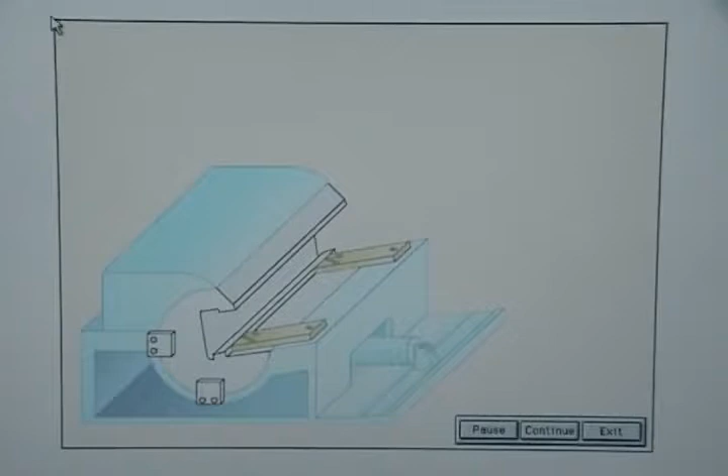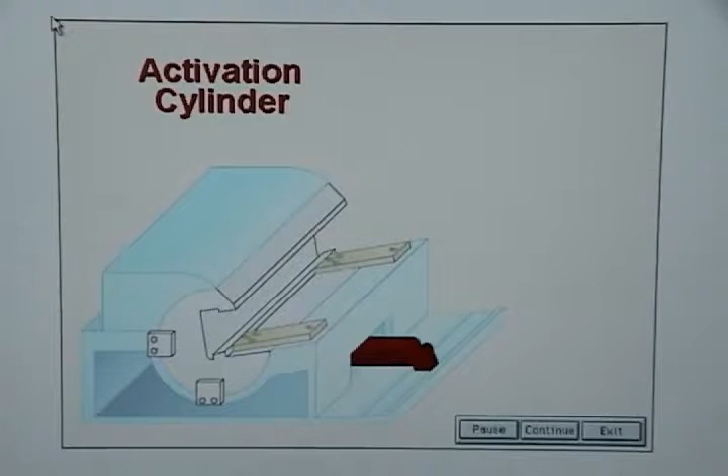Rotary cams were developed to improve the process for forming flanges. They eliminate die flex and improve part consistency. A rotary cam is made up of a rotor, drive plates, a rotor cap, end stops, a rotor holder, and an activation cylinder. The rotor is a cylindrical detail that rotates into position to complete the part geometry.

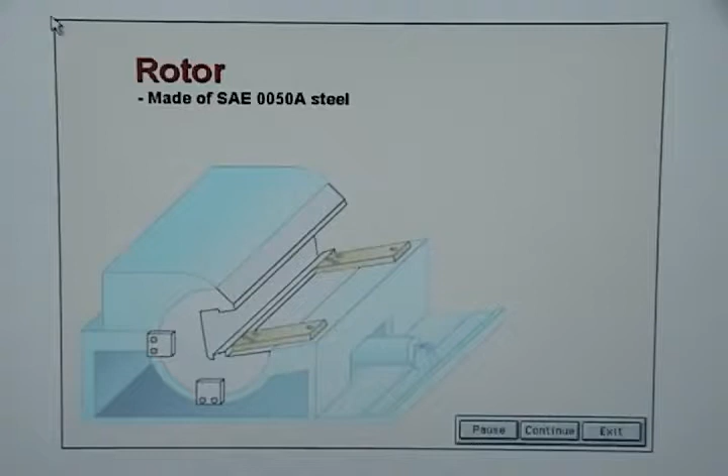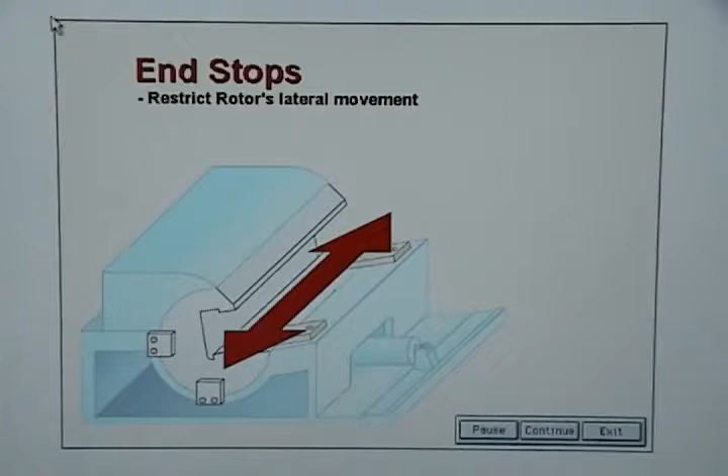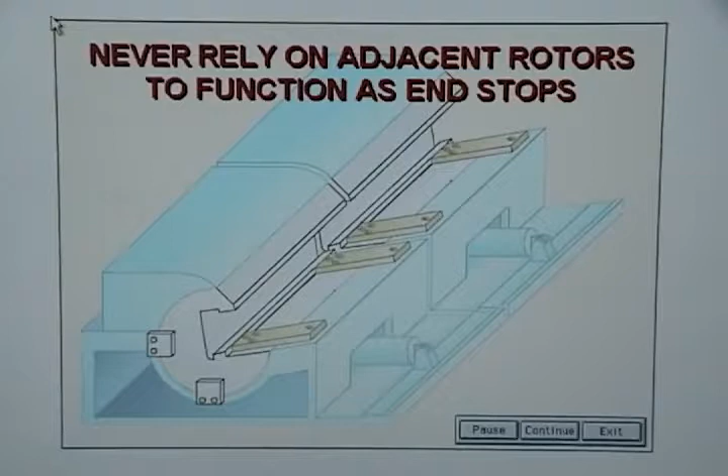Rotors are typically made of SAE 0050A steel and are not usually heat treated. End stops restrict the rotor's lateral movement. They can be located at the end of rotors or along the rotor. Die makers should never rely on adjacent rotors to function as end stops, because doing so could cause the rotors to rub against each other and bind.

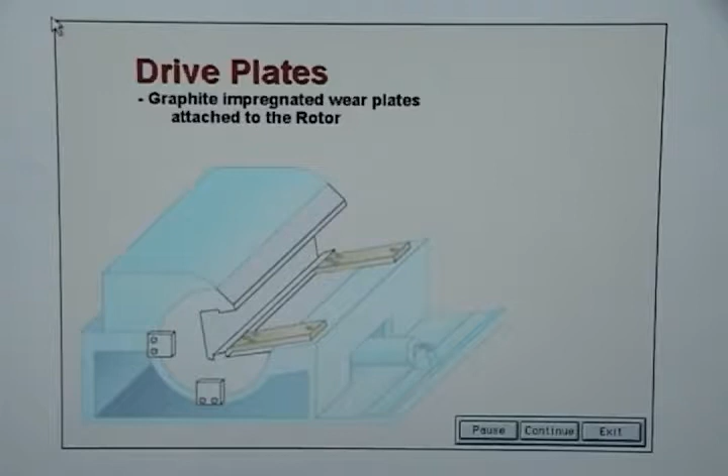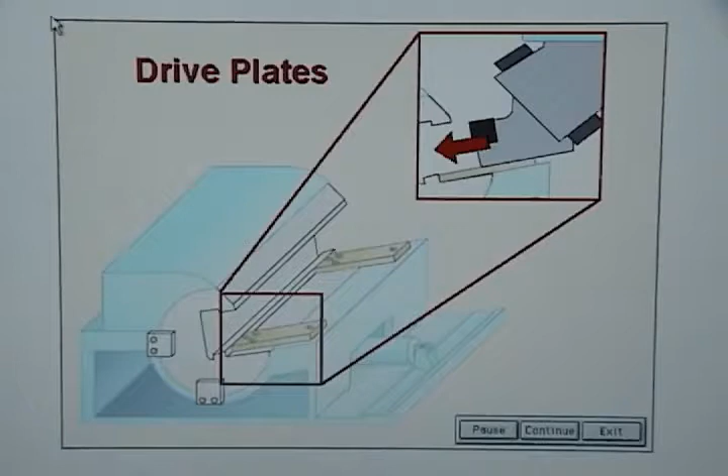Drive plates are graphite-impregnated wear plates that are attached to the rotor. When the rotor turns from its home position to its work position, the drive plates provide the surface for the cam slide to move on during the flanging operation. The rotor cap is mounted to the rotor holder and covers the full length of the rotor. It gives support to the rotor and provides part geometry.

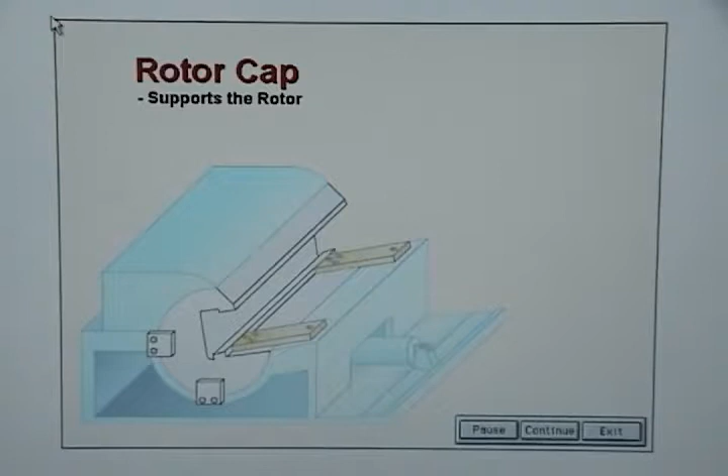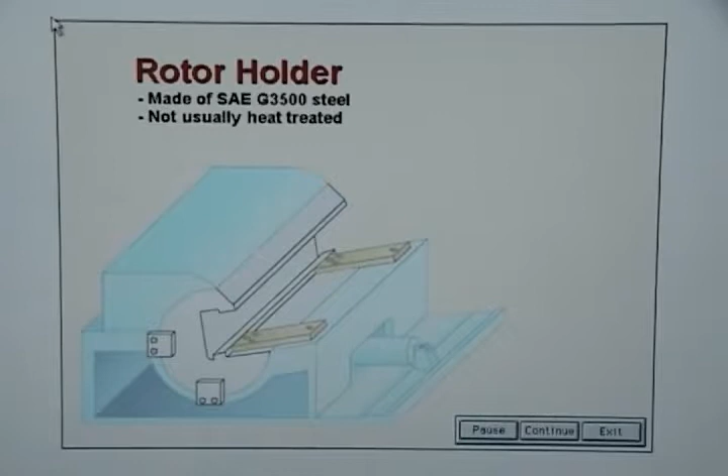The rotor holder holds the rotor. It is made of SAE G3500 steel and is usually not heat treated. The rotor holder and rotor cap are keyed and bolted together to form an assembly. The assembly is bored as a unit, and then the rotor is ground to fit the bored assembly.

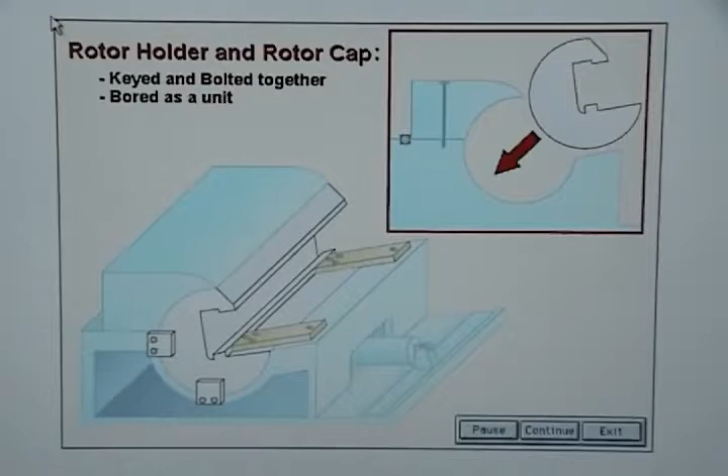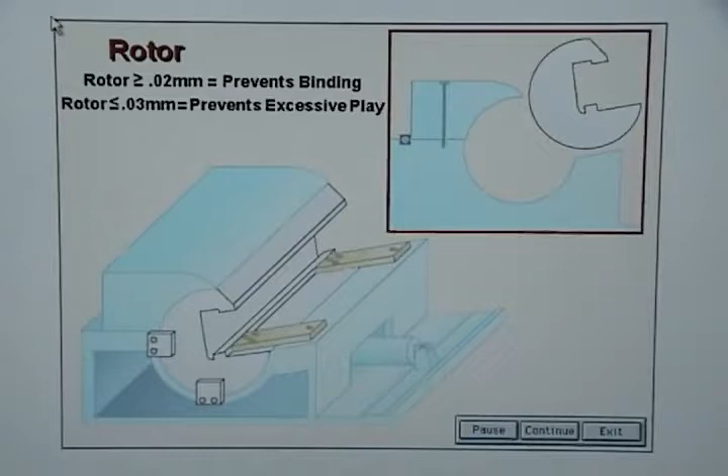The rotor must be at least 0.02 of a millimeter smaller than the bored assembly to prevent binding, but not greater than 0.03 of a millimeter, or else there will be excessive play. After the rotor is ground, it is referred to as the master, which means that the rotor holder and rotor cap must always be spotted to the rotor.

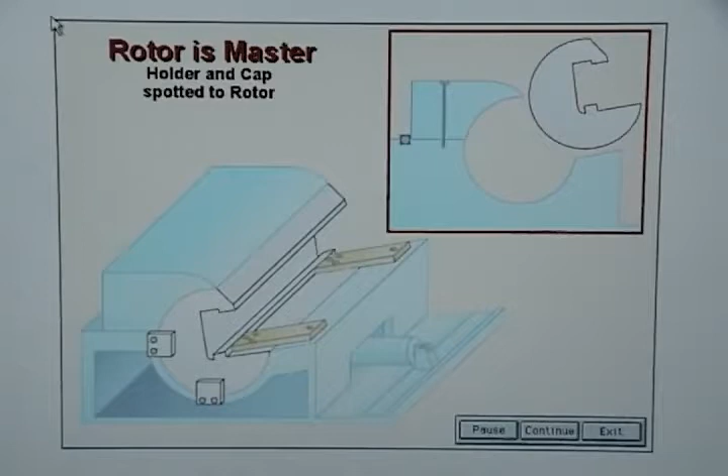The activation cylinder is used to move the rotor to its work position and back to its home position. The activation cylinder operates when the press reaches 2 program positions. When the press reaches the first program position, the activation cylinder moves the rotor to the work position. When the press reaches the second program position, the activation cylinder moves the rotor to the home position. The activation cylinder must be pressurized with between 20 and 25 pounds of air to operate properly.

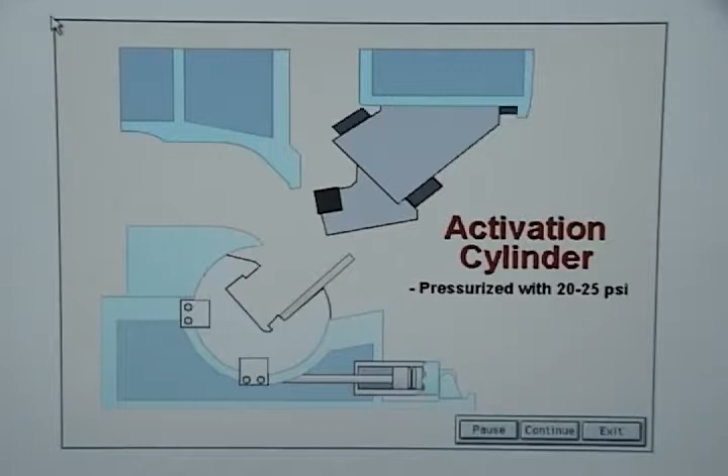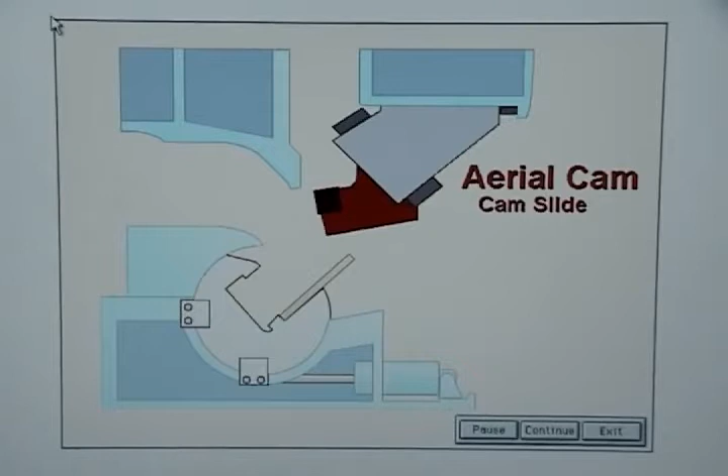An aerial cam is made up of a cam adapter and a cam slide. The cam adapter attaches to the die and has a spacer behind it for making position adjustments. The cam slide is usually the component that holds the flange steels. As the press moves downwards, it reaches the first program position, and the activation cylinder moves the rotor to its work position. When in the work position, the rotor supports the part and provides the holding surface for the press pad.

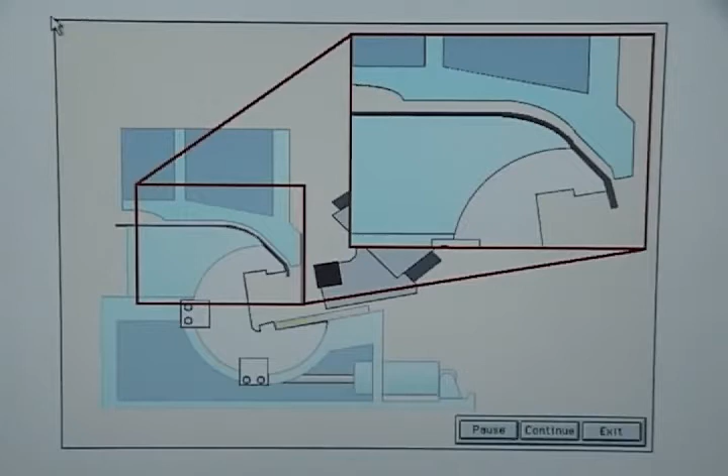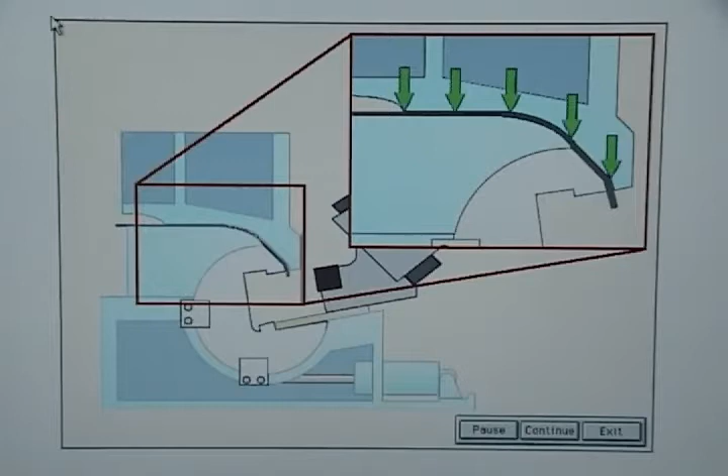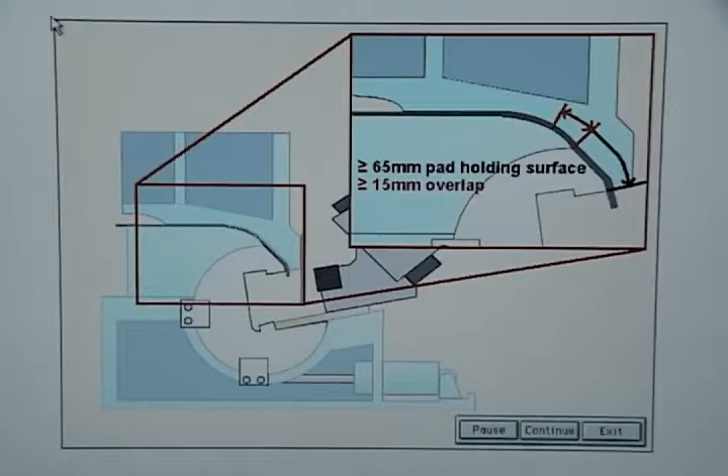The drive plate should bottom out 5 to 10 millimeters before the press pad contacts the part. The press pad provides pressure to hold the part while the flange is being made. There must be at least 65 millimeters of pad holding surface along the flange line, and at least 15 millimeters of it must overlap onto the rotor cap. After the press pad contacts the part, the horizontal motion of the cam slide forces the flanging steels into the part and forms the flange.

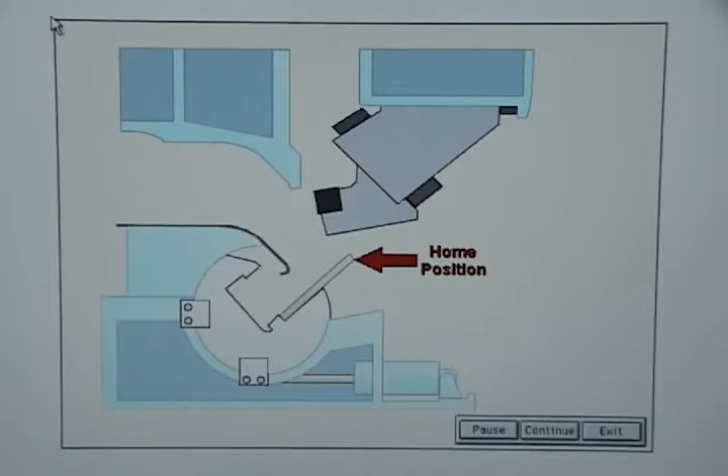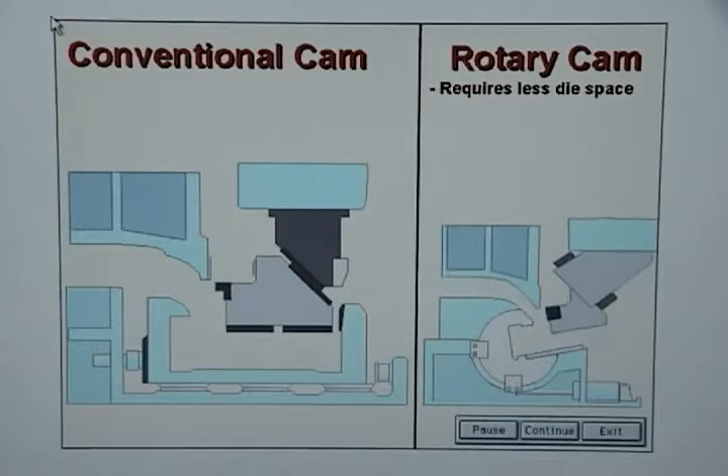As the press begins its upward cycle, it reaches the second program position, and the activation cylinder pulls the rotor back to its home position. This provides enough clearance for the flanged panel to be removed from the press. Rotary cams have several advantages over conventional cams. Rotary cams are compact and take up less die space than conventional cams. Their rotary motion allows flanging operations to be performed using a small amount of die space, whereas the horizontal motion of conventional cams takes up a lot of die space.

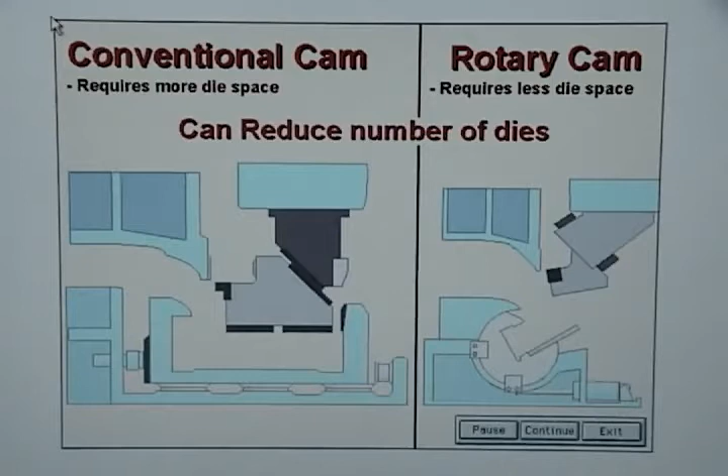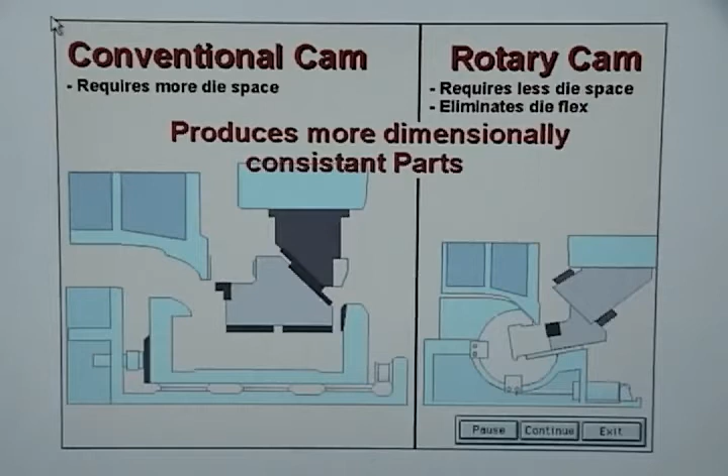Saving die space is important because it creates room for adding other operations to the die, which can reduce the total number of dies required to make a part. Rotary cams also provide an extremely solid base for the die that prevents the die from flexing when under pressure from the press. This is important because eliminating die flex results in parts that are dimensionally consistent. Conventional cams require more hollowed-out space in the die. This reduces support and causes dies with conventional cams to flex when under pressure from the press.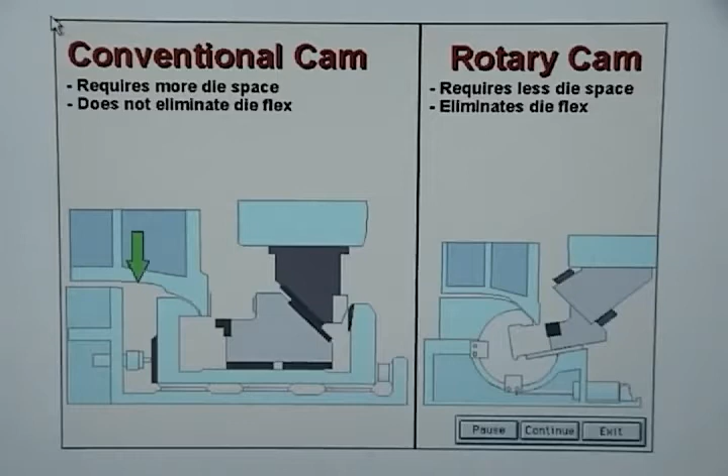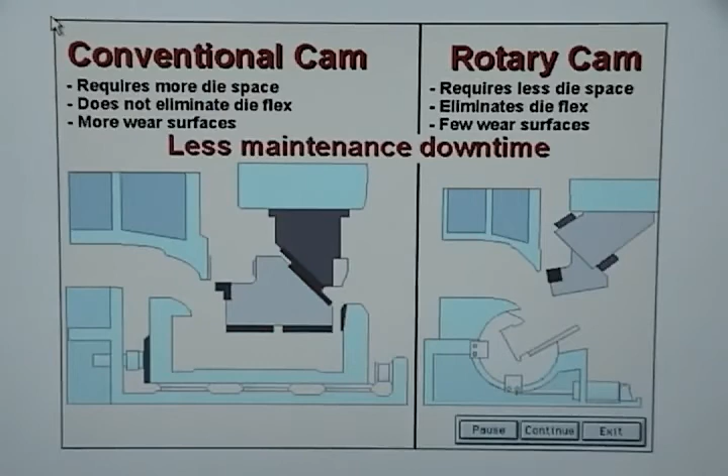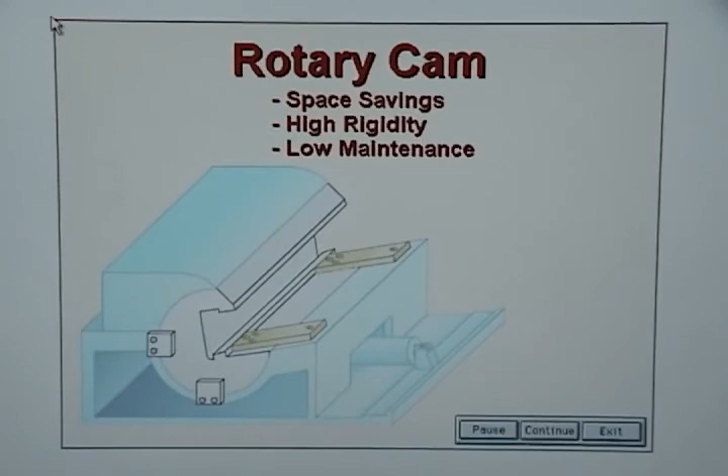Rotary cams have very few wear surfaces, whereas conventional cams have many wear surfaces. Fewer wear surfaces result in less maintenance downtime and higher production. Space savings, high rigidity, and low maintenance make rotary cams an effective tool for making flanges.